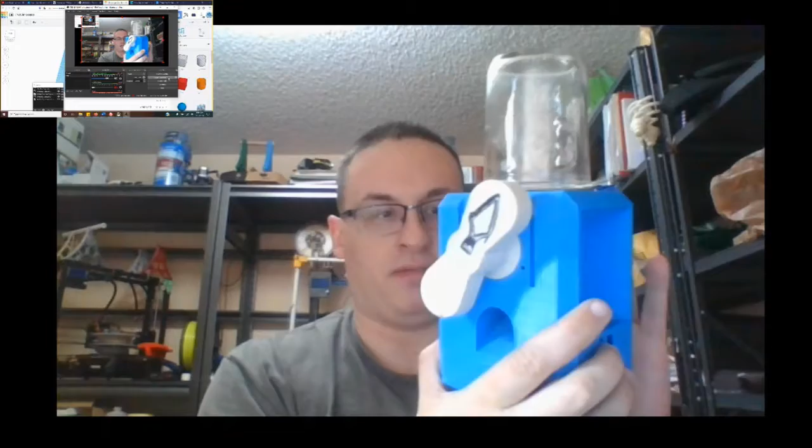When you turn this, you'll actually get candy out of it. This was a simple design that another person did. I'll include the link below or in the description. I found that I use this at a lot of trade shows because candy attracts people to your booth. But before, it was originally just flat along the side.

The mechanism inside is very simple. It's just a ramp that goes to here, and then the knob here. This is your dispenser that turns. So this doesn't have any coin mechanism or anything, it's just a little dispenser, and it has a retain clip that goes here.

So this was primed to be modified, and I'm going to do that now in Tinkercad as an example of how you can modify things that have already been designed.

In Tinkercad, start by opening up a new file, and over here you have three options: import, export, and send to. I'm going to import the design that I downloaded earlier.

This is going to be an STL file, so I want the main snack body. It gives me this option here, it tells it what it is, the scale, and all the dimensions.

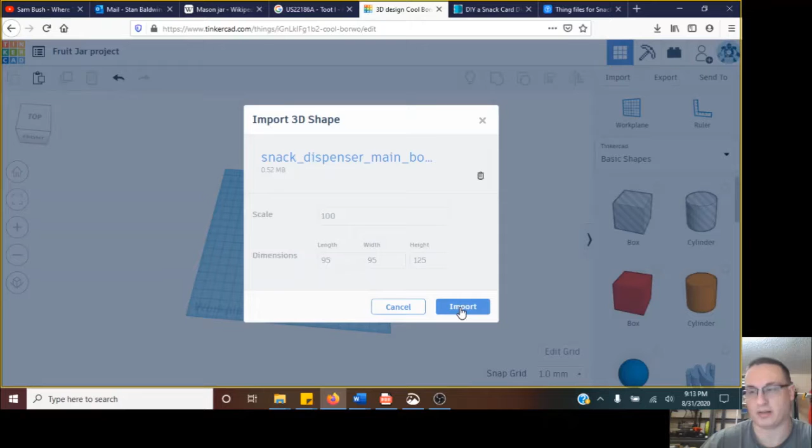This particular piece is probably pretty large, so you want to check and make sure it'll fit on your build plate. Some of the smaller desktop printers won't be able to handle it, but not a problem for mine. So I'm going to import it.

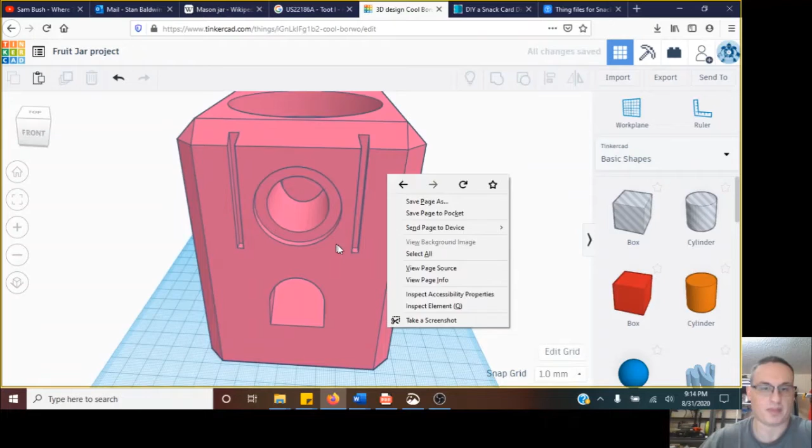And rotate it around. So now I have the basic shape that I want to modify, because on the sides here you can see it's flat, and if I make it transparent by hitting the letter T, I can see the mechanism inside of it. Again, this one doesn't have a coin-op mechanism or anything like that.

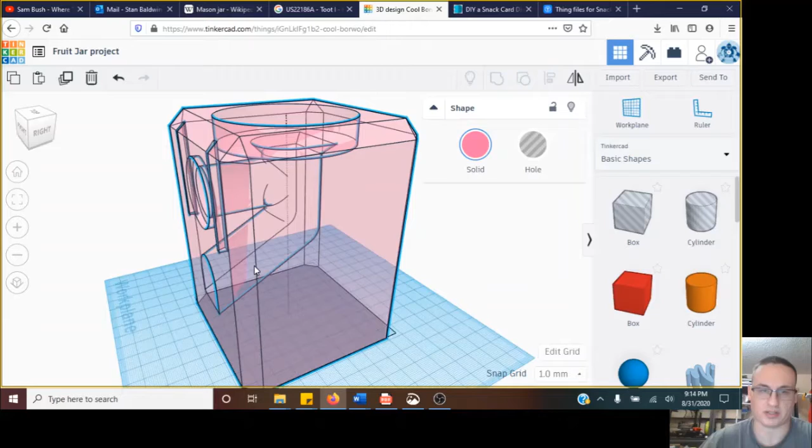There are coin-op ones you can download and print. You're going to be doing a lot of fitting though if you do that. So this one's a lot simpler. And for everything I do, this is an absolute conversation starter.

Now that I have the basic shape, I want to put a slot in that's easy to get business cards into. Under the shape generator menu, there's a trapezoid.

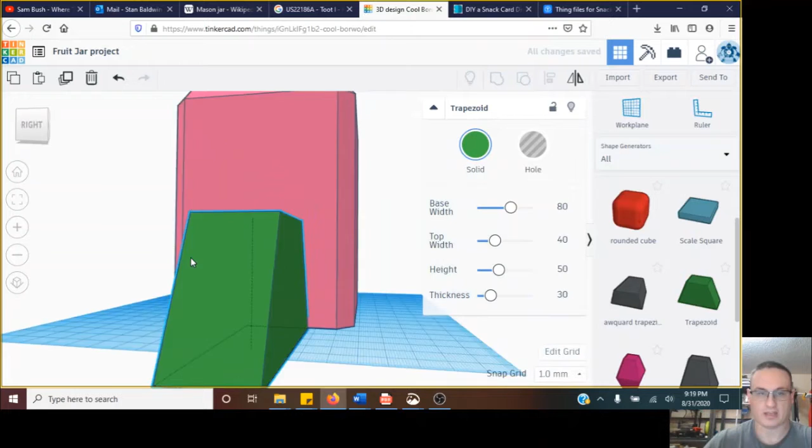Right now it's, you just have to work the shape. I'm going to hold the shift key to rotate it flat. I'm going to roll it first, and then yaw it 90 degrees on the z-axis.

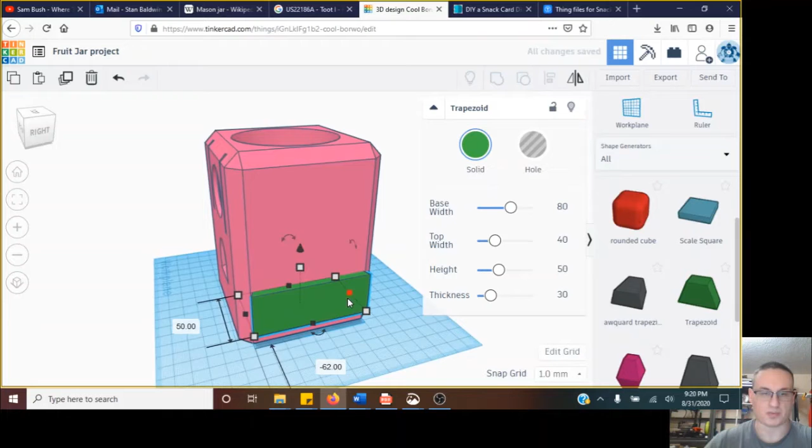I want to make a space with a little bit of a lip to hold this in. I can tell right now that's going to be a little bit too wide and too deep because it's going to cut through that. So I can make it thinner, say about 30.

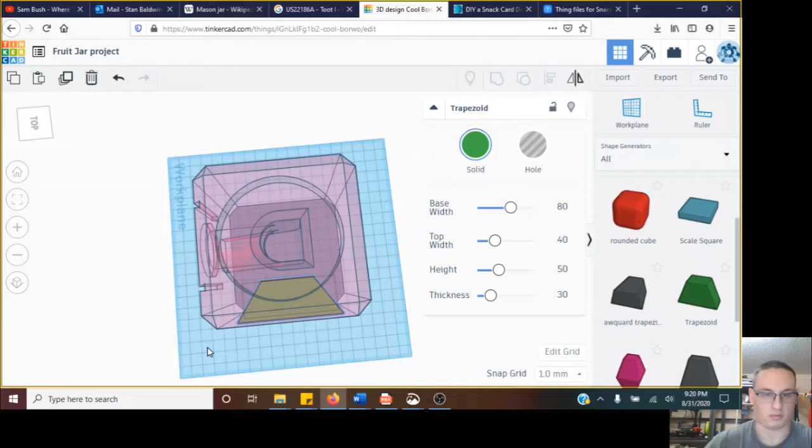Now I want to make sure it's not going to hit any of the other internal parts, so look all around. And it is a little bit off the build plate, which is what I want.

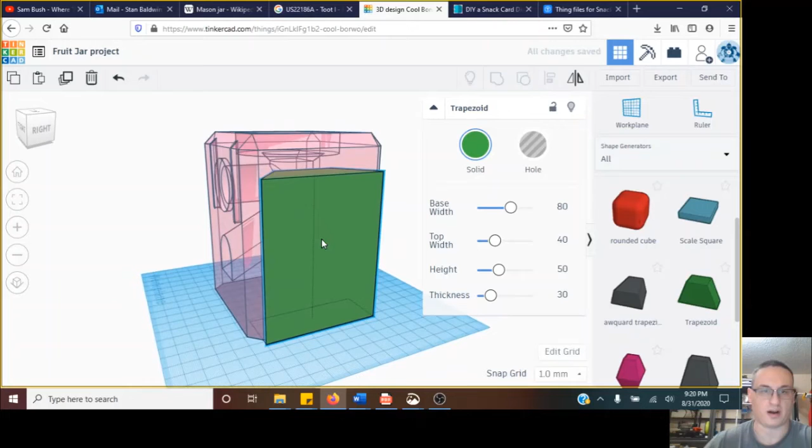I'm going to go ahead and make it about yay high, because I do want to have a little bit of a lip up here. And if I drop it down, that's going to be too far. But pick it up maybe about 10 millimeters off the build plate. That gives it a good ledge up here and here.

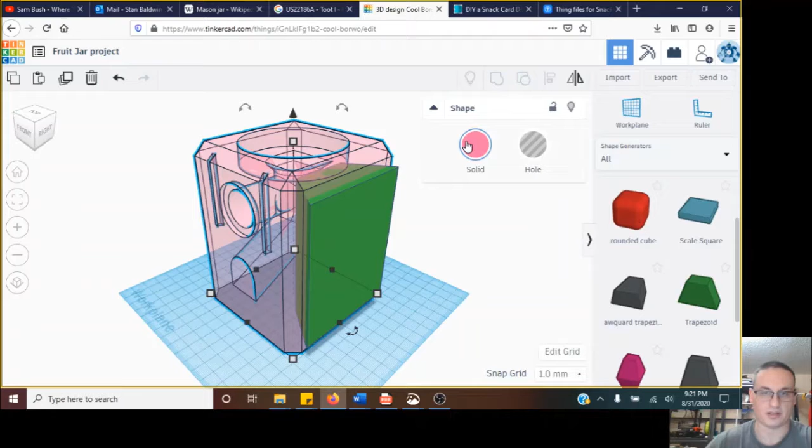So check everything around it. And now if I do this, I'll make this a solid, so I'll hit letter T. Make this a hole. And if I group this, it now puts a nice area in there to do that.

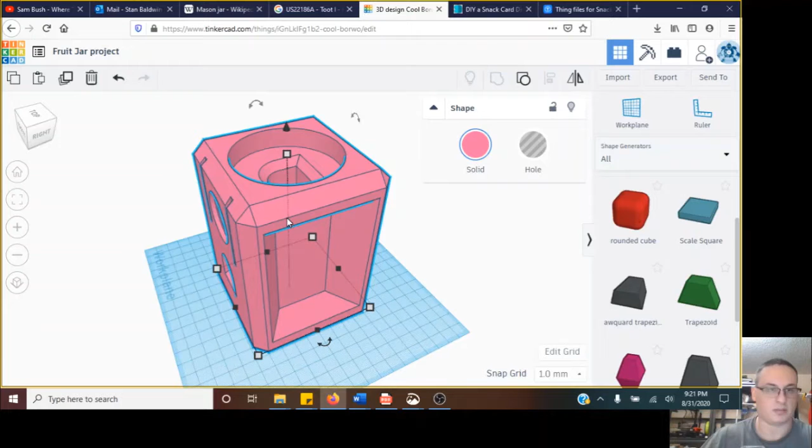Get some actual business cards now and check, because you want to make sure that this area here, you have enough space here. So I'm going to undo that, double check that width at the top of the trapezoid.

On your shape menu, when you click on the trapezoid, it actually gives you base width and top width. Your card is going to be about 51 millimeters wide, so it needs to be about 55, just to give it a little slop. Now when you try that again, that's still going to fit just fine.

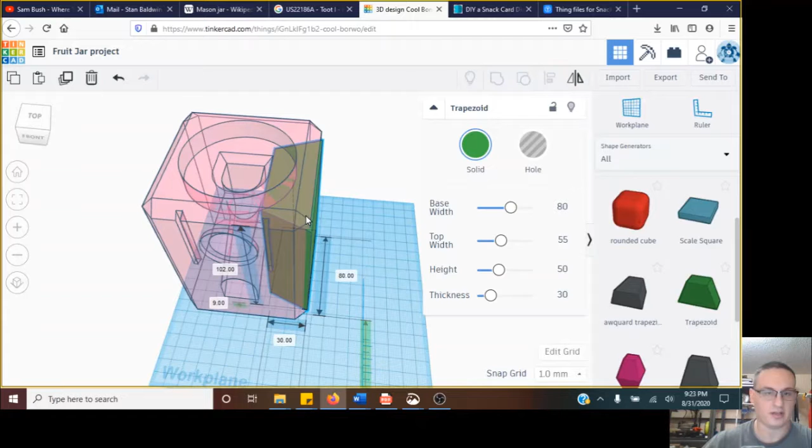You can play with the depth, but just be aware that you want some support around this. So maybe have it go in about 10, 15 in. You could also change the thickness, because right now it's 30.

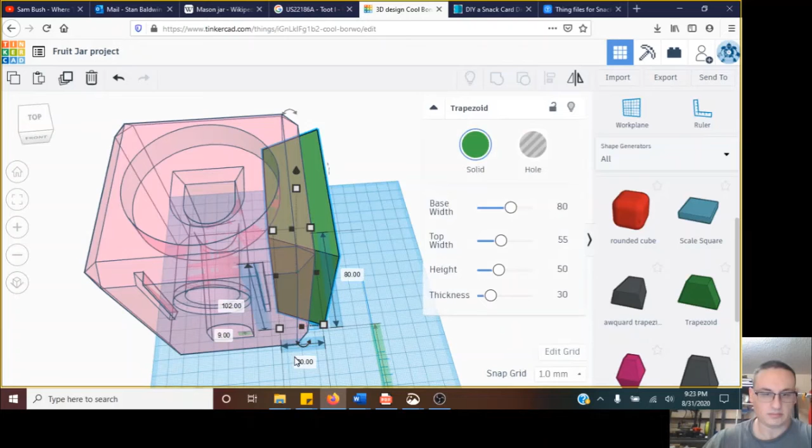On this original one, I went in about 25 millimeters. So I'll go ahead and change that to 25.

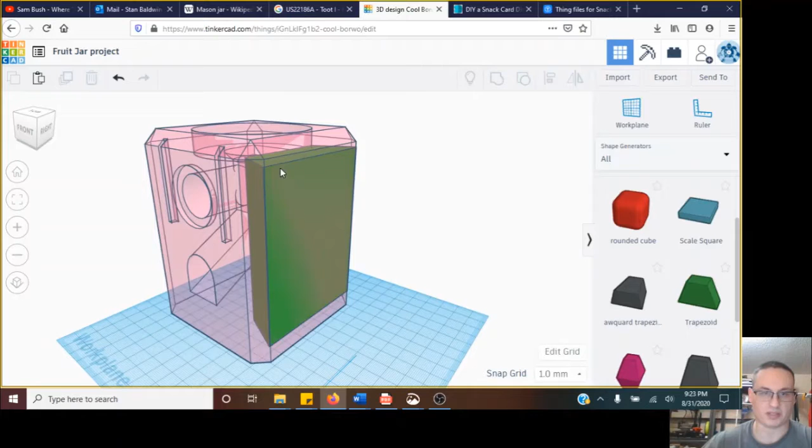Now I could actually use the Align tool, and I could align it on the edge and center, and even center it up on the Z-axis. But that's a little bit higher than I want. I want some lip up here. So I'm just going to drop this down back to where I had it before, at 10 millimeters.

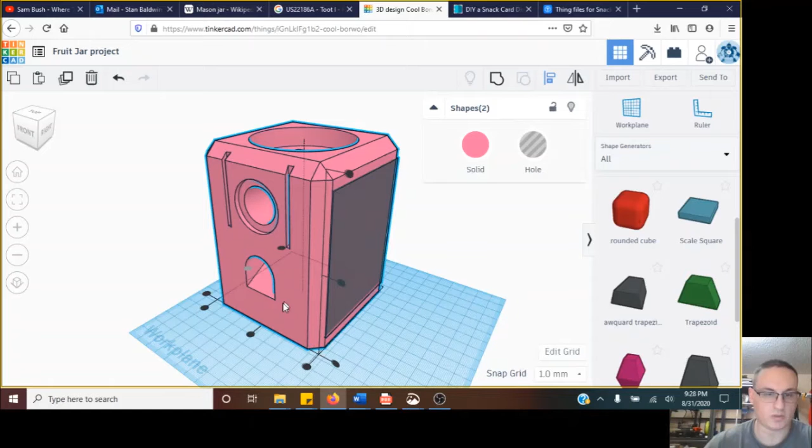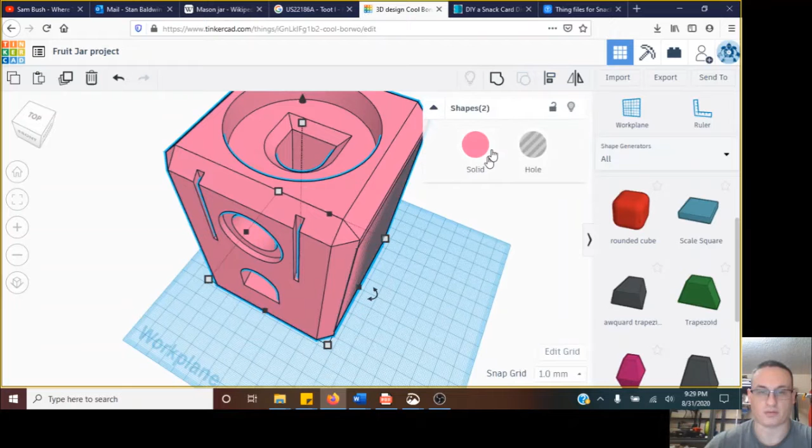So I'm going to use the Align tool. I'm going to center on the X-axis center, and I'm just going to have it touching the Y-axis right. Now when I do that, you can see here that it's got that hatched pattern that drives you crazy, but it is centered. So if I group it, it puts that hole in the side, which is what I want. And this will be the cavity I use to set up the business cards.

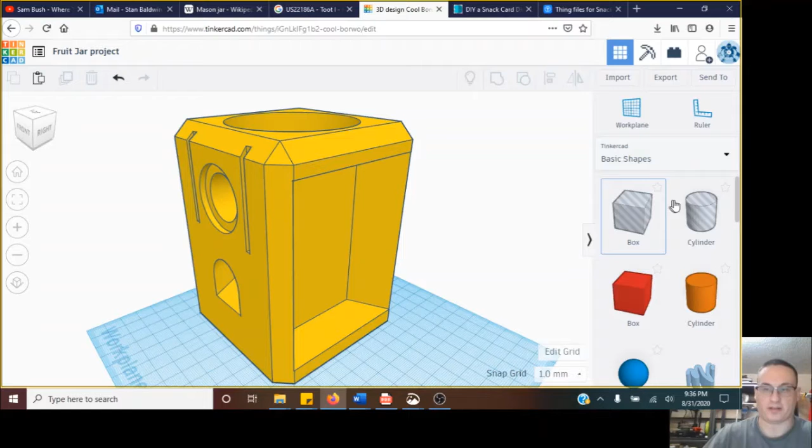So next we want to put an edge or a lip to actually retain the cards inside the holder. The easiest way I found to do that is just get a thin box, make it maybe about 2 millimeters thick by the width of the hole.

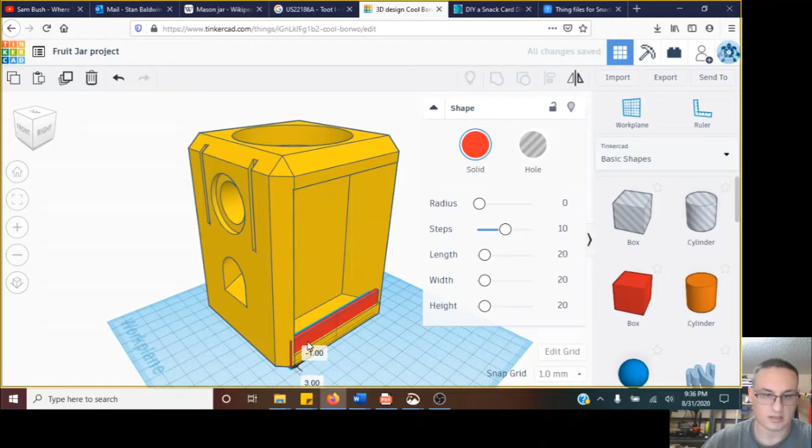We're going to put it on the edge there. Get it just about that width. Make sure it goes all the way across. So you could use your F or focus fit to view, and carefully pull that across that space.

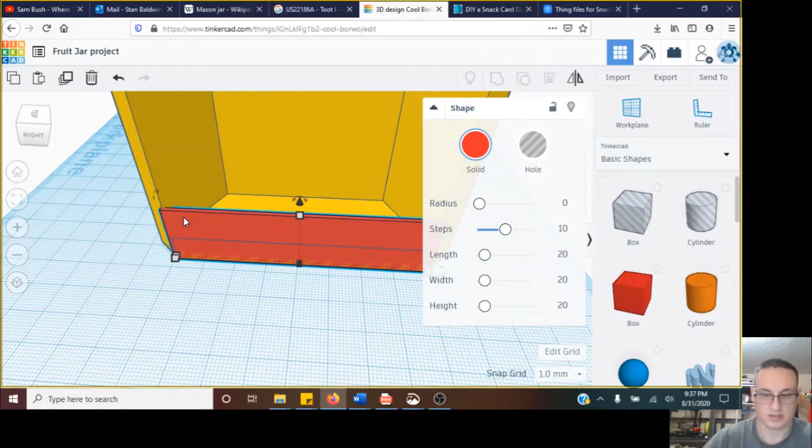And use that to flush that in. Now remember, you could always use your Align tool. Get it to line flat on the edge. And let's make this 80 across, since that's the size of the trapezoid.

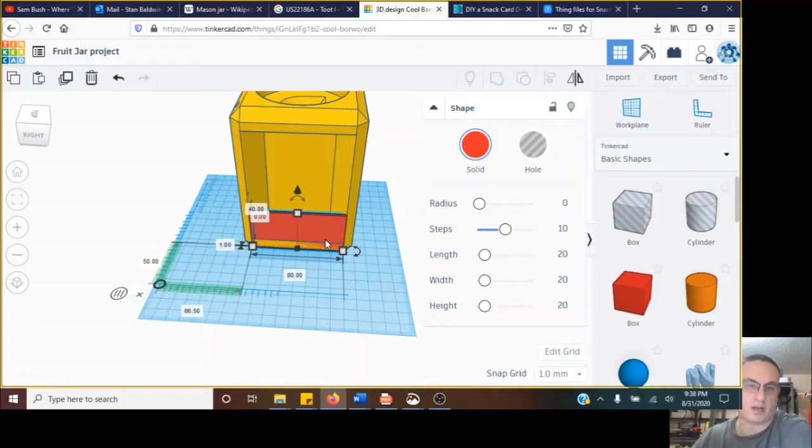So now that that's fit with the edges, I could center this. And need to make it a decent height to hold the card in. So I think on the original one, I've got it about 45. That seems to be a good height, because we want the cards to be held in, but still be able to drop out when someone grabs them.

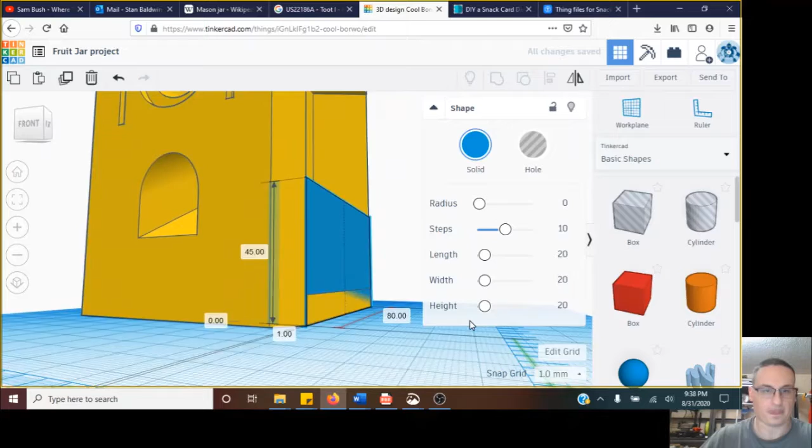Go ahead and change the color on that. So when you're done, you can go ahead and group that together.

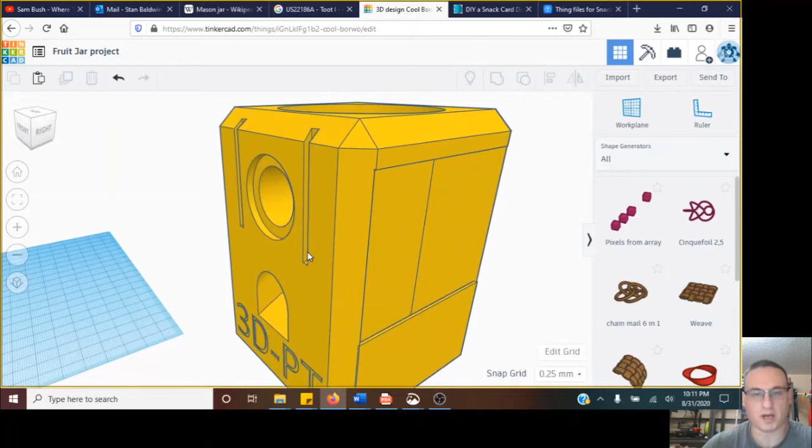So this is how you can import an object and modify it in Tinkercad. So for this one, I took the basic shape of the dispenser body, added a slot for business cards, engraved it on the front, and added texture to the side.

And you could go and further customize this in many different ways. Obviously, if you need to do improvements like adding some weight to the bottom, you could do that. And as you print the other pieces, you can make sure they fit here, or you could change the design.

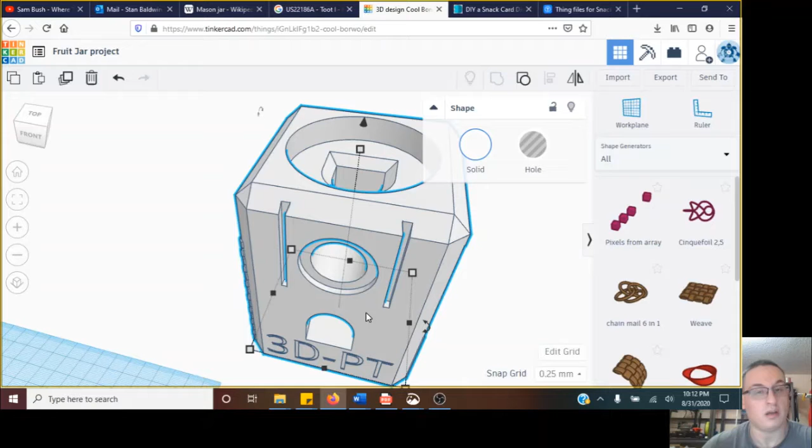So I actually modified the retainer clip and the knob, the handle that came with this original file. But you get the idea that you can modify the pieces as you see fit. And the advantage of this is you could do a lot with this in terms of either fixing other files that aren't very good, or you could take other designs and modify them for your specific needs.

So later on, I'll cover parametric design, which is programmable design you could do in this. But for right now, this would be something different that you could do for like a display piece or a trade piece.

This is only one example of how you can modify just about anything that's designed for 3D printing. Look through file sharing sites like Thingiverse, Prusa Printers, and My Mini Factory.

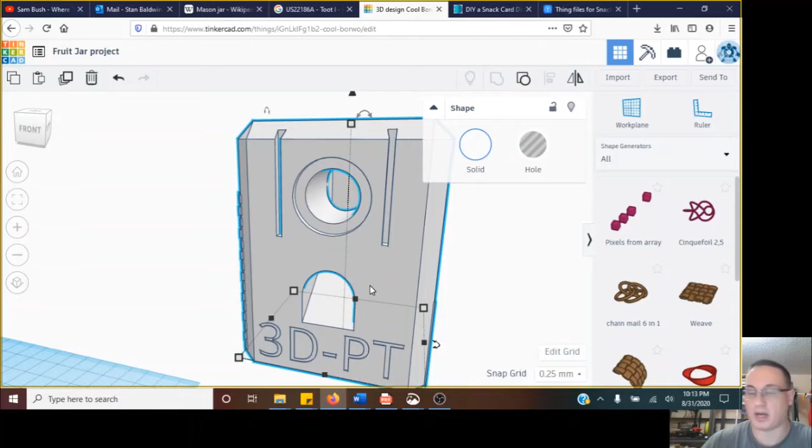Find files that you like but want to modify. For this activity, you don't have to modify a candy dispenser like I did, but do find something that was made from fruit or mason jars and modify those.

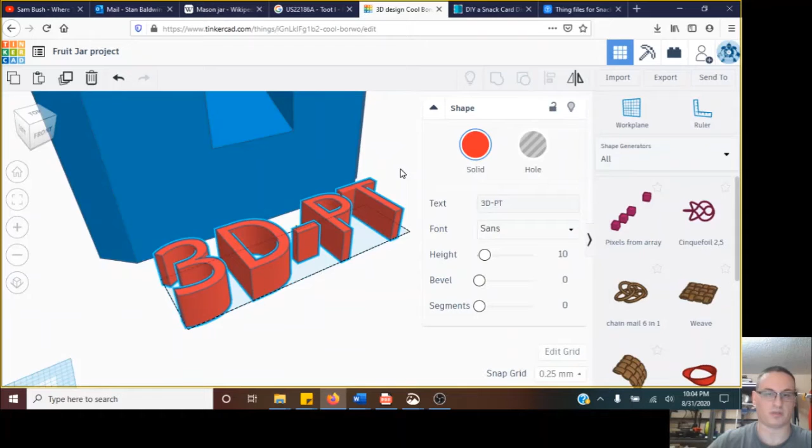With this, you could have other options to customize or do more design work. You could put in text and do an emboss or engrave. Engrave goes into your print and produces a hole. Embossing means it stands out, so it would stand out as a solid object.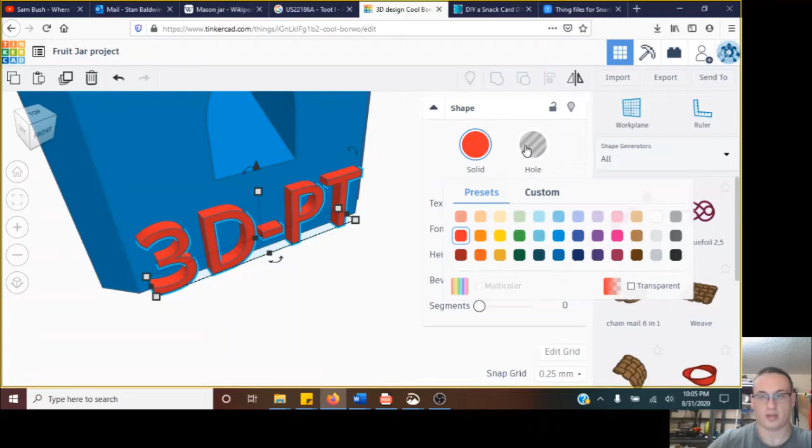Just be aware that if you emboss, you're going to have to provide support material for all these overhangs. I prefer to do engraving. It generally looks a little bit better, and in terms of printing it just works better. So I'm going to engrave this real quick.

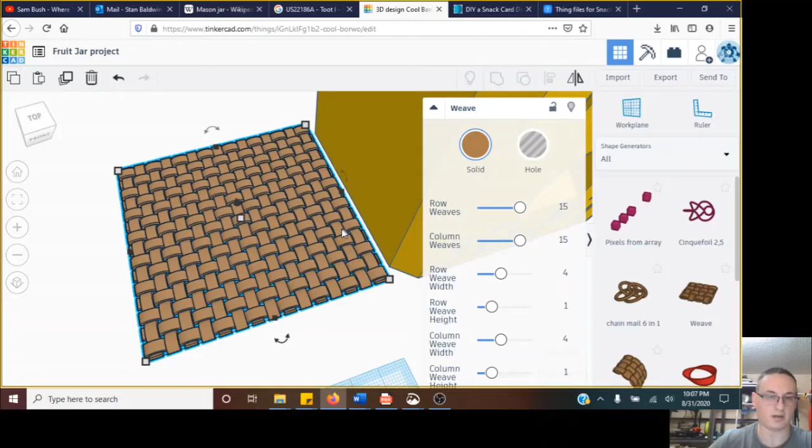I can also put texture on the surface here. Under the shape generator menu, there's a weave pattern, and I expanded it to 15 row weaves and 15 column weaves. With that, I'm going to pitch it 90 degrees.

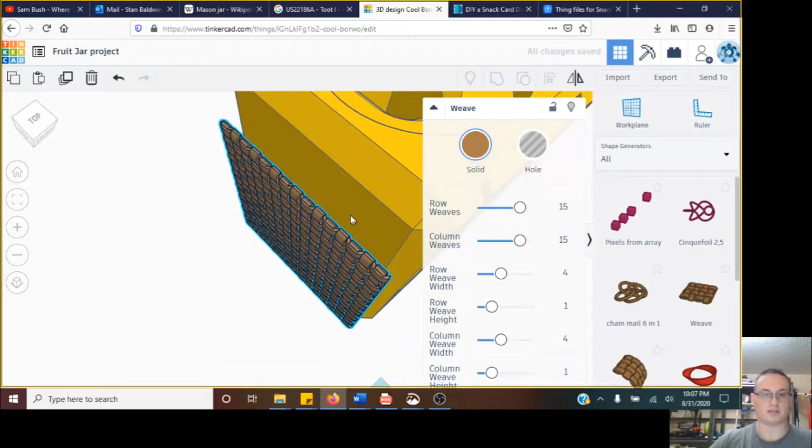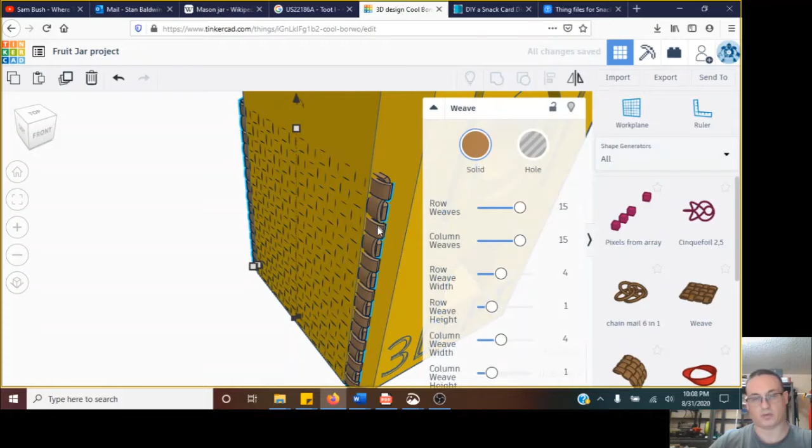Now I'm going to use this to actually put it into the side here on my piece. I could have it textured coming out or in, and I could play around with alignment to do that, because if I align it this way, it's not going to show up—that's because the alignment tool works on the footprint of the shape.

Unfortunately, the footprint puts it pretty much in the center, so I have to bring it out. I can either have it going all the way out like that, or if I make it into a hole and look closer, it'll actually embed that into the face.

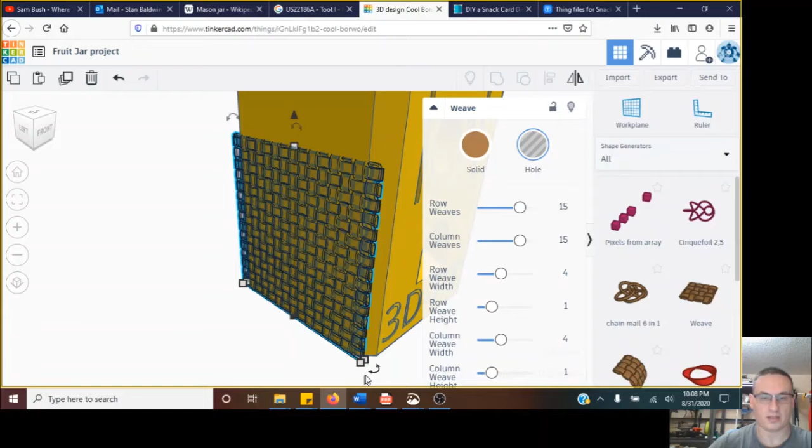So you can play around with this. Right now, if I group this, it's not going to like it—the red means it's rendering. And that produces a very interesting shape there.

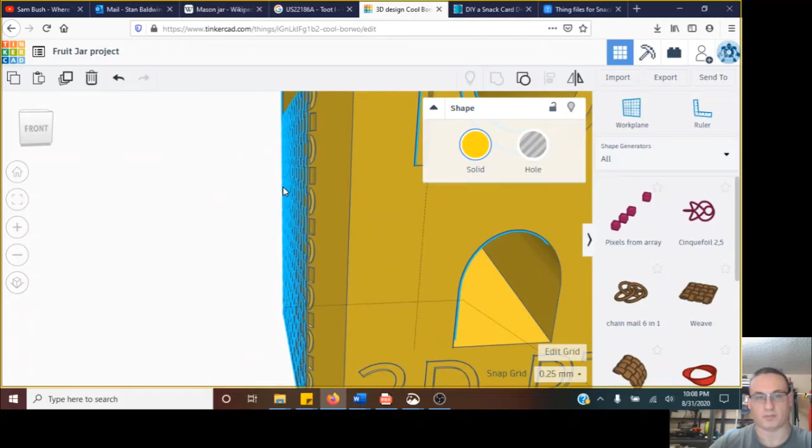So you can texture your piece like this. Just watch out that it goes all the way through on that. So I could undo that.

Or if I make it solid, I have to make sure it's going to be the width of this piece, so I'll turn it down just a bit so it matches.

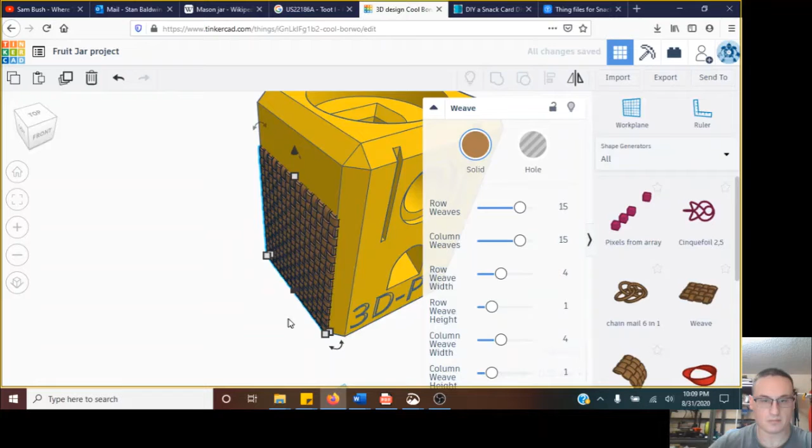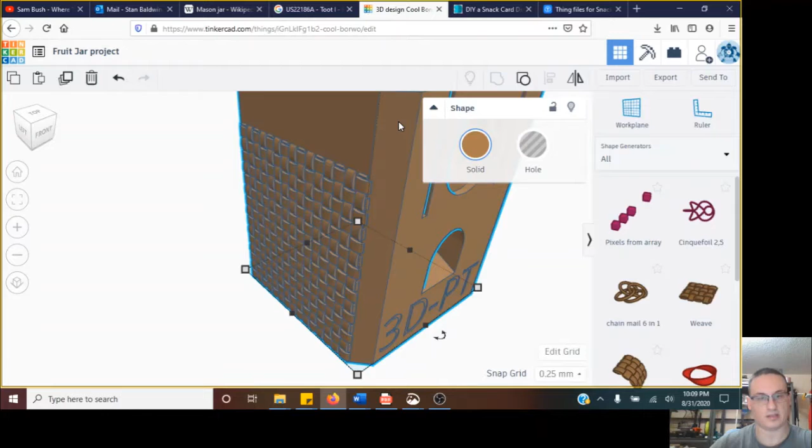And so now if I group it—more complex shapes take a little longer to render. Let me change the color so it's easier to see. You can see that I put a weave texture on the side.

This could be a great way to make things more aesthetic, or a way to add grips or anything else to the outside of your surface.

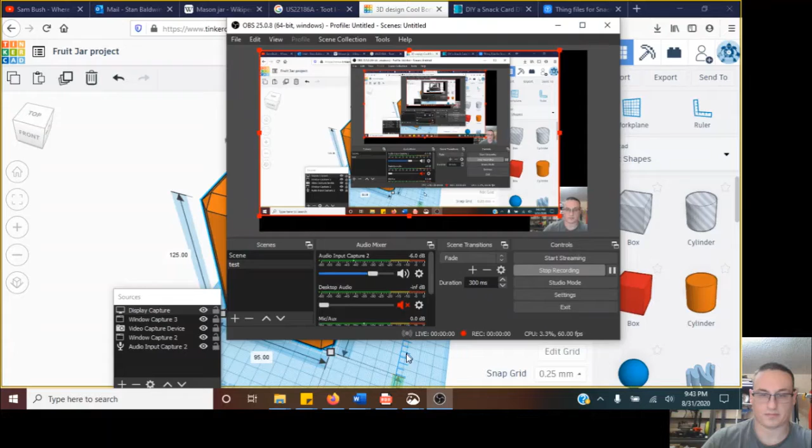I've actually used this at quite a few trade shows, and one thing I noticed is that when it has a full jar on top, it gets a little top heavy, so I wanted to put some weight in it. I'm going to add a cavity that could take either poured plaster, or I've got a ton of these fender washers, so I'm going to make a space big enough to accommodate a load of them.

You could also pour in some plaster or cement and use that as a weight. Just make sure it doesn't come close to where the food makes contact. You'll probably want to use washers since they're removable, but you could add some different things.

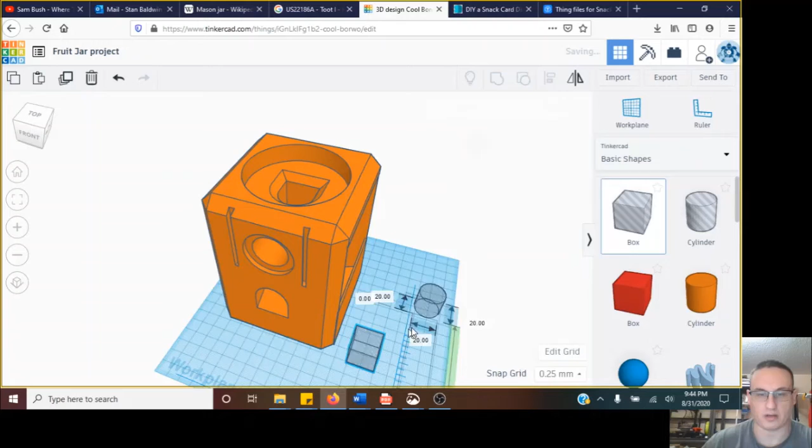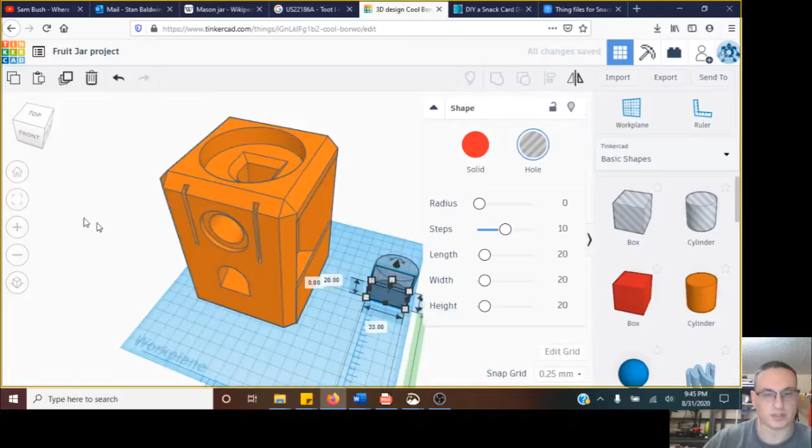I know my washers have a diameter of 33 millimeters, so I'm going to use a box and a hole. Let's scale that up to 33—let's type it in, 33. Now if I focus on those, you can see how they're lining up.

So again, I'm going to use my—oops, what did I do wrong here? Oops, I accidentally made the height on it 33. So let me fix that to 20.

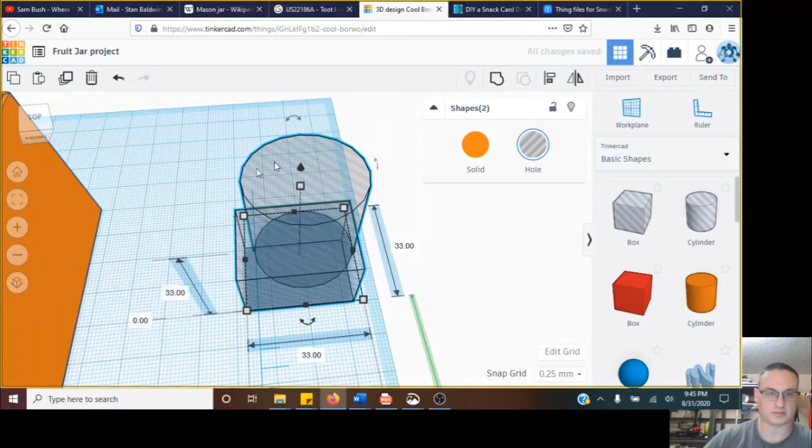So if you do something like this, it's because you just clicked on the wrong dimensions. So you're probably going to make that mistake a lot.

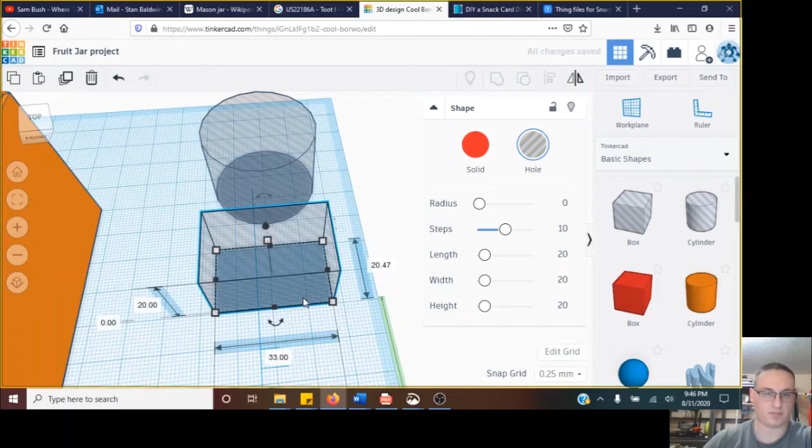This has to be 33 because this is going to be the way I access that. And make it longer than it has to be.

So now I'm going to center it. And because I'm using the top of the cylinder, I'm going to rotate this sideways, and make this the basis for my cavity.

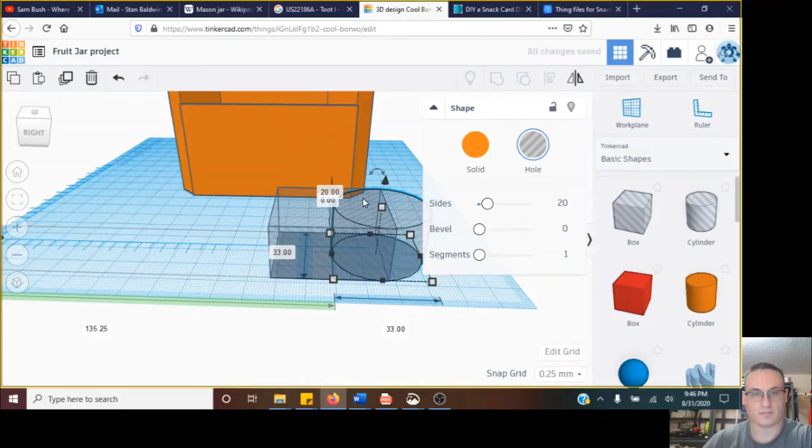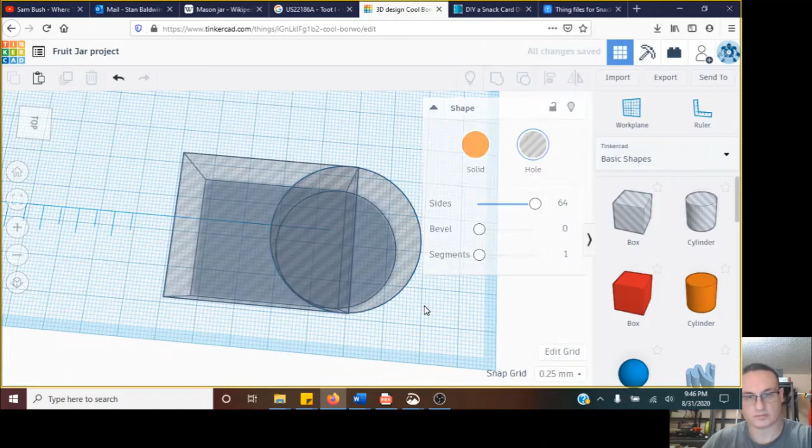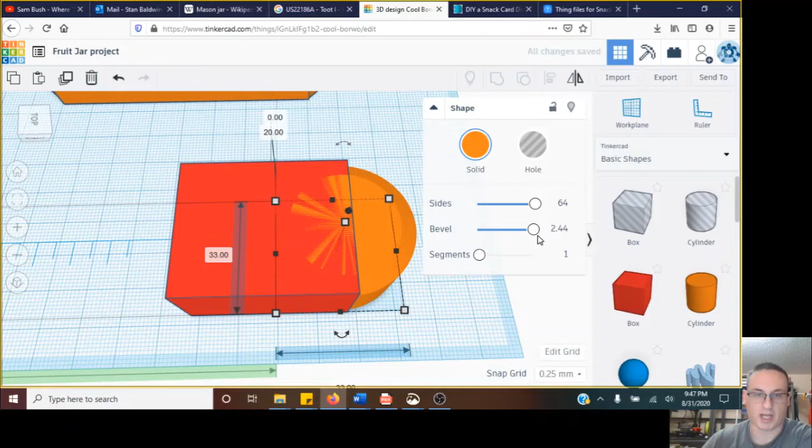So now focusing on that, I smoothed out the circle or the cylinder because if you click on the menu for that, it gives you an option for the number of sides and bevel. The less sides you have, the blockier it's going to look. The more sides, the smoother it's going to be. Bevel adds an edge to it, but won't need that here.

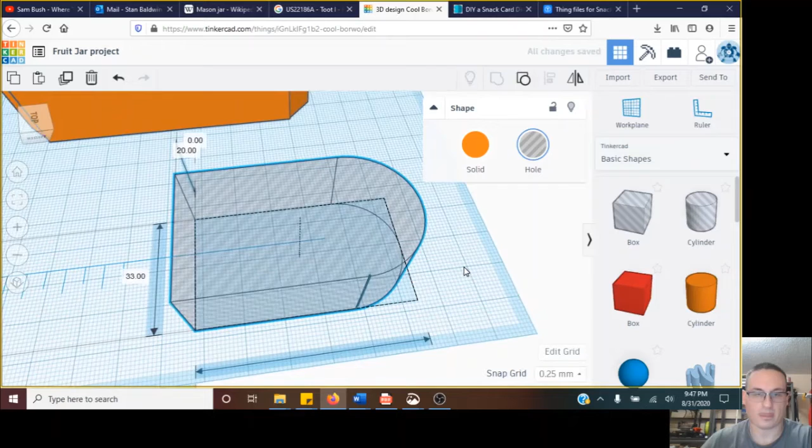And so now, take that and line it up to that edge. Make both these a hole, group them together. And so this doorway hole is what I use to make a cavity.

So after making this cavity with just a box and cylinder, I'm going to place it inside. Pretty much the only place I could really put it is kind of in the back, which works just fine because people pull on the front of the dispenser. So I'm going to pitch it down 90 degrees.

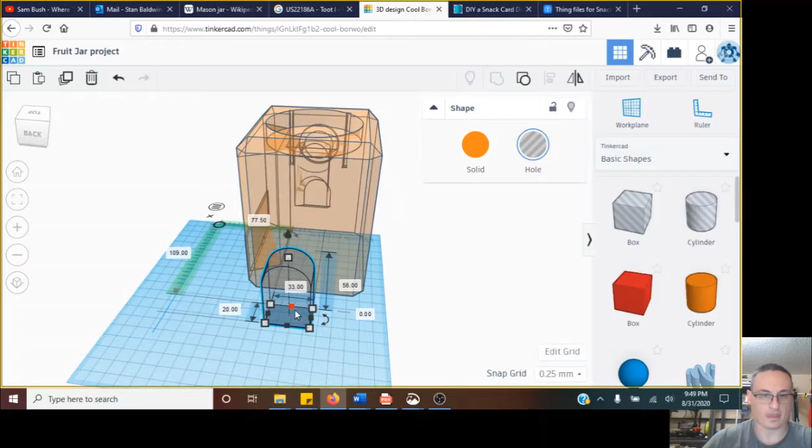Let's see here. And yacht 90 as well. So by placing it inside, I can then play around with the dimensions of it, make it longer or shorter, as long as the width stays 33.

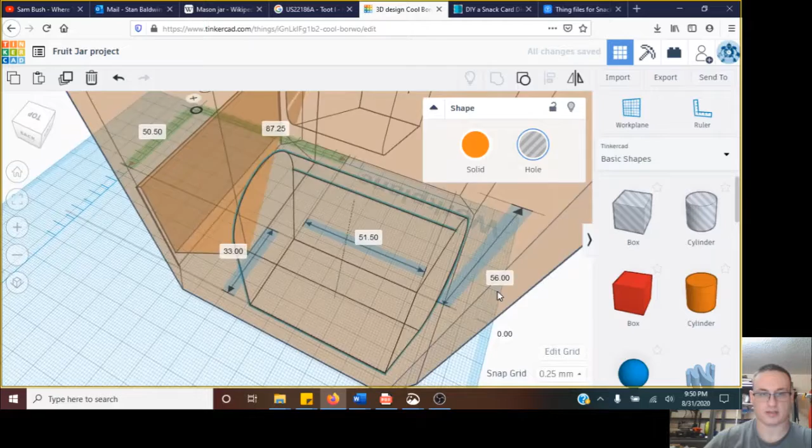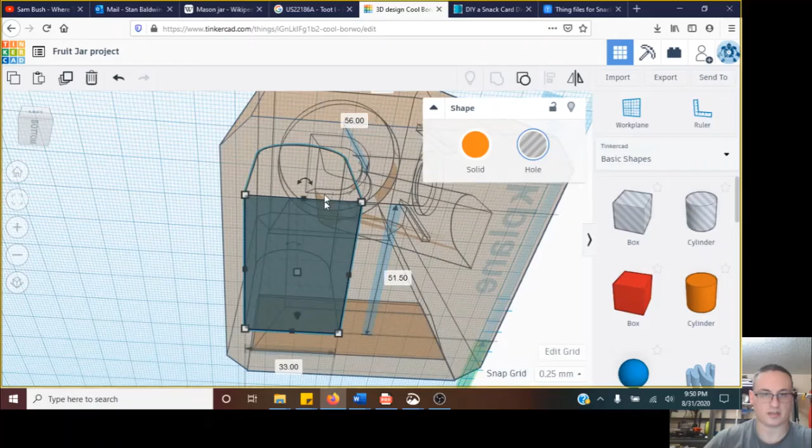And yeah, I'll go ahead and center that. And height-wise, it's about 56 at 33. So let's make it 66.

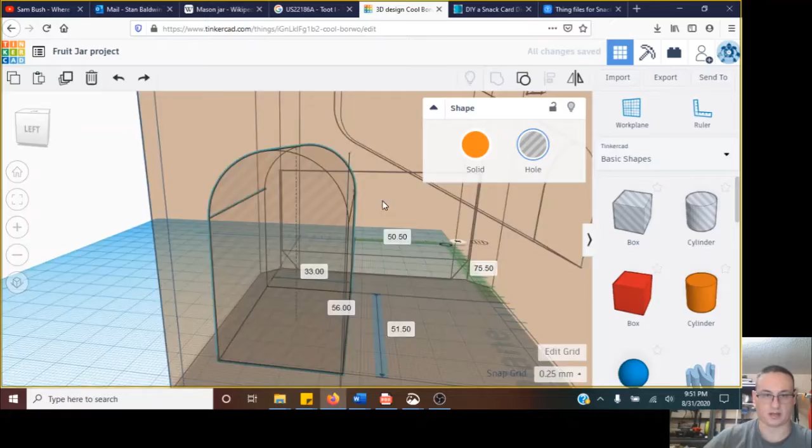So that way I can maybe put double, but notice that that's starting to get close to the point here where that's making the funnel, so that's not going to work. But I could copy and paste that.

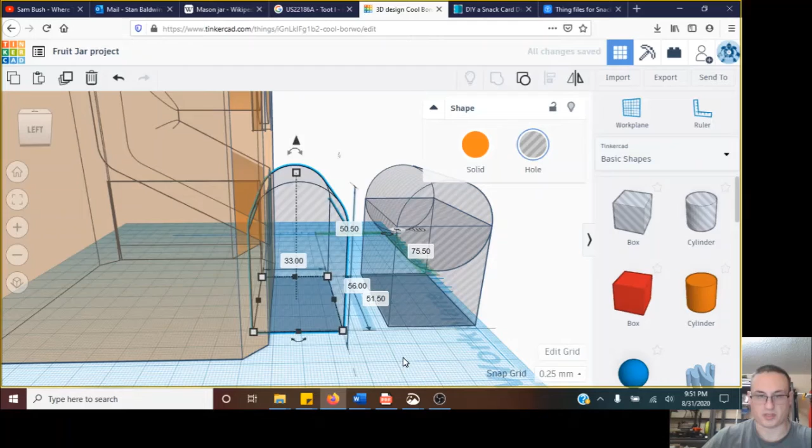And smush that down. Oops, don't want to do that. I'm going to ungroup that and smush down the box.

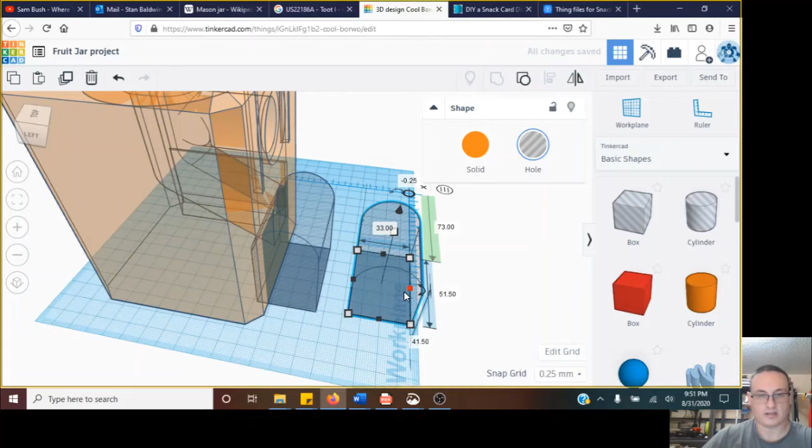Pull that down. And do it that way. So I have two domes, but when I bring them over my main body, they hopefully don't interfere with anything inside.

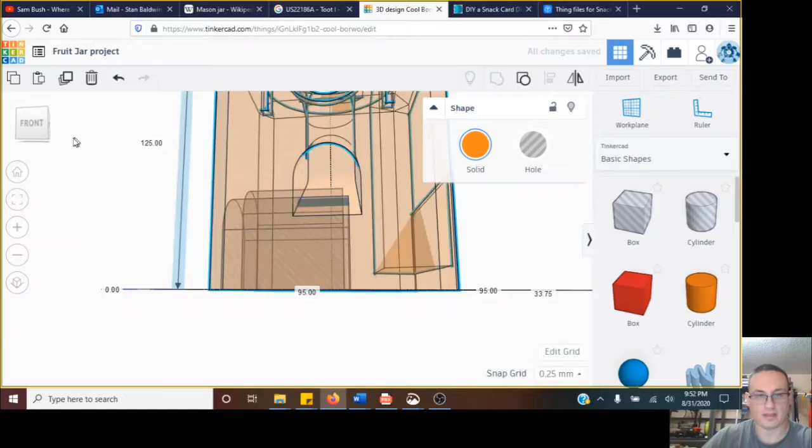Shape. And I can see now that it's already touching the bottom part of the chute, so that's not going to work, have to drop it lower.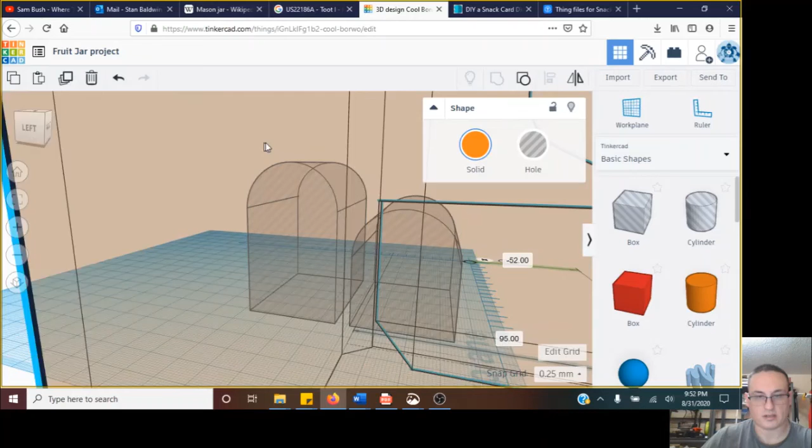And I could go down to 34 millimeters in height. So I just need to drop the square here.

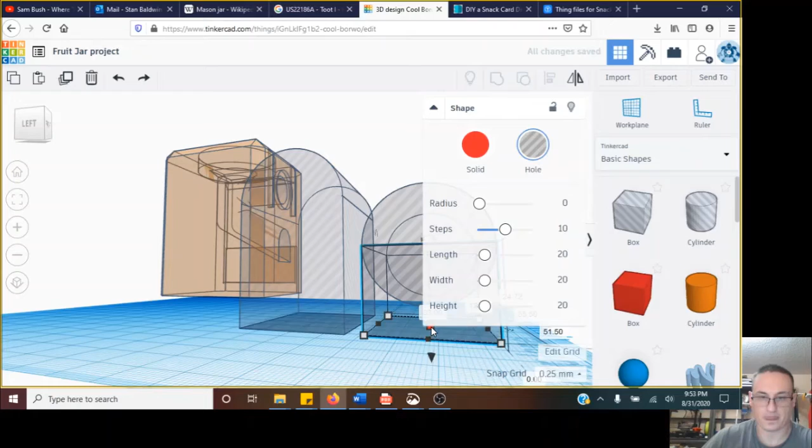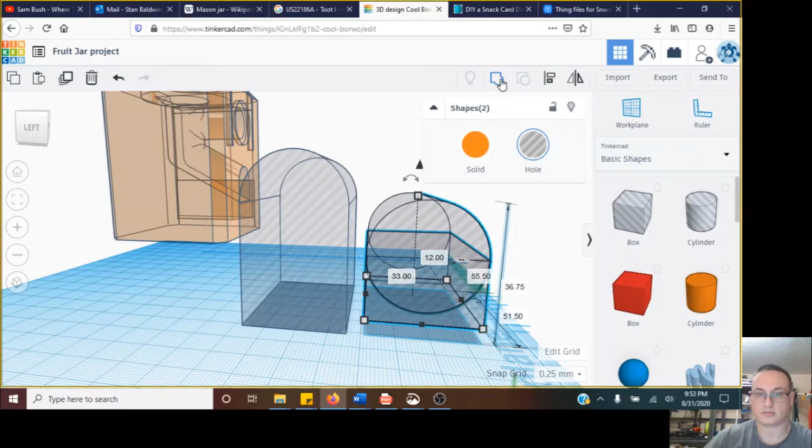Make sure this dimension's the same. 33, 33. And do it that way.

So now that I've looked at that, there's actually a design issue. So if I group that right now, those holes that I put in would go all the way through and wouldn't work.

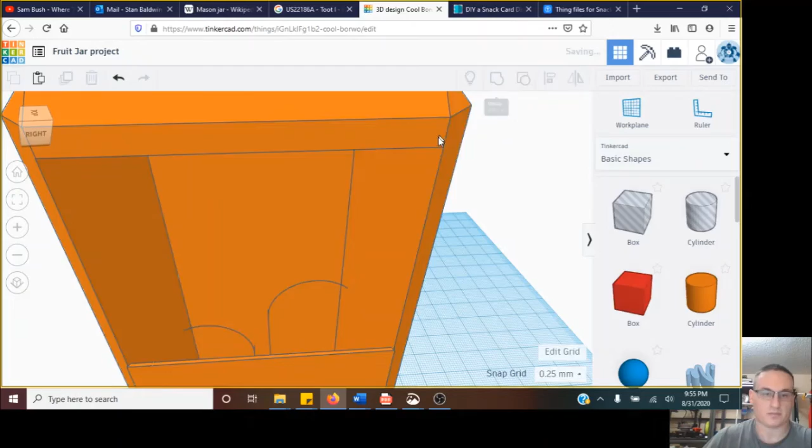So this is why you want to switch between transparent and normal mode, just so you could see all that. But this is something that I could easily correct. So if I pull this up in transparent mode, I could see it crosses here.

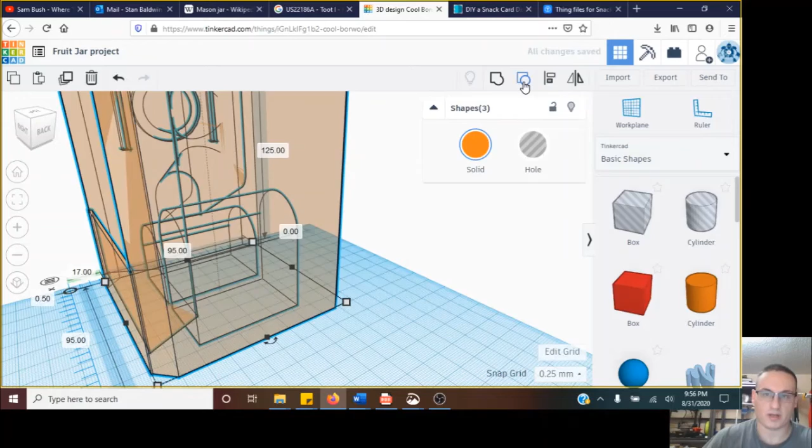So ungroup. Pull these both out. And so I want to make these narrower, so I'll say about 35, if I find the right axis.

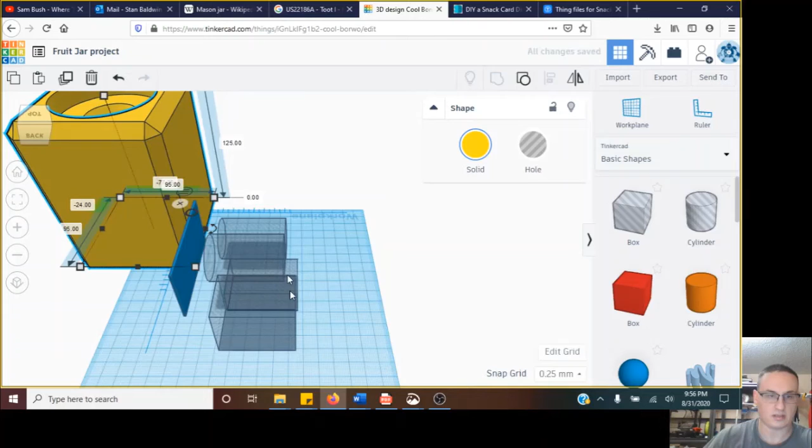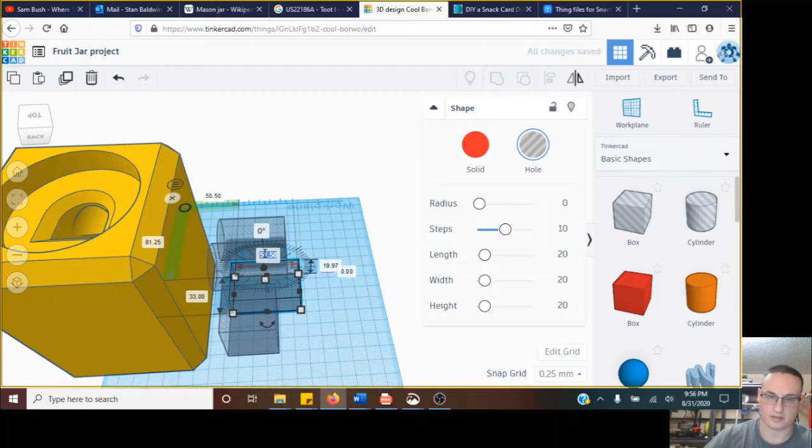And so you can play around as you design, just always check your shape, make sure it's on the same side. It's not going to cause interference or hit something weird. So make those 35. Cylinders 35 in width.

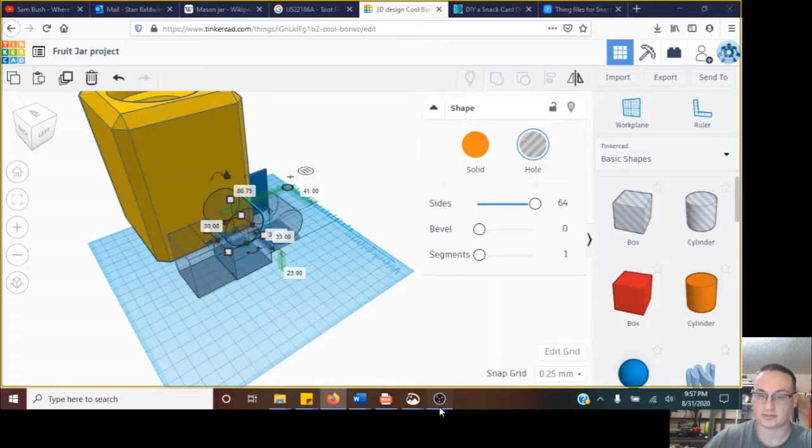And then just regroup those and play with them. So I removed the blue lip piece here, but now that I do this, I can check on the edge here and see that it's not going through. And it does go underneath the tunnel for the candy here on the dispenser.

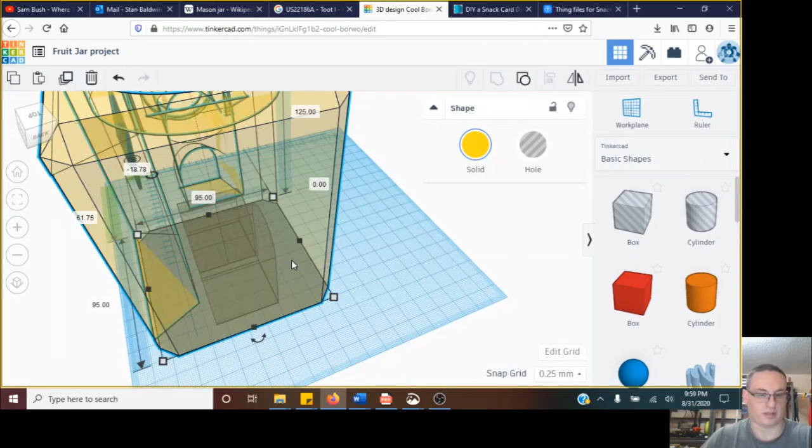So make this transparent. And now when I group it, I'll just group everything in the shape here. It reduces the holes on the bottom, and when I make it transparent, it's all the way through there.

So I'll go ahead and fix the other piece, but here is a basic way you can make, or you can modify, an object on Thingiverse for 3D printing for your own needs.